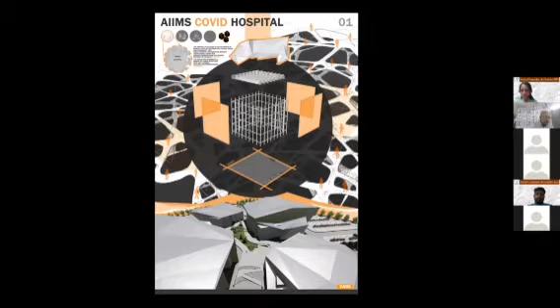And what is a celebration without its food? So, taking food into consideration, we have developed our concept from the delicacy of Gujarat, which is actually dhoklas. So, it's a little fun path that we have taken, and we wanted to go through the different ways we could extract a concept from food. So food being an art form by itself helped us derive a concept, and the structure resembles a rigid yet porous structure that has a unique feature, or in other words, flavor.

So coming to the concept again, one of the main reasons celebration is so important in Gujarat is because it helps the people reflect an overall attitude of gratitude and acknowledgement of what people have instead of focusing on what they don't have, or on anything in the future. And this is something that we try to cultivate within the hospital itself. That's the kind of mentality or ambience that we would want to achieve, to be a safe place basically.

This is the initial stage of the strategies that we derived and adapted to represent the word flavor and to represent our concept. And as you can see from the pictures, we try to abstract different forms that make use of the word flavor in terms of color, shape, and other ways. You'll notice it when we start the actual presentation of the master plan and the structure by itself. So, yeah.

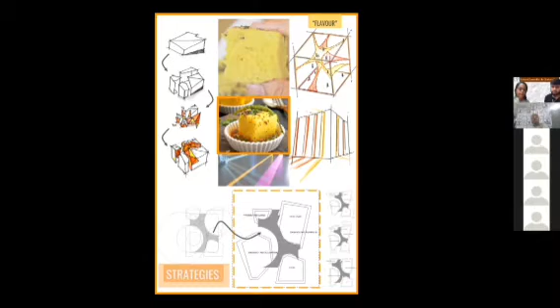Coming to the master plan, the orientation of the building is aligned in east-west direction, allowing abundant air and wind flow to penetrate within the building structure. So the entire AIIMS project site was 300 acres, out of which we chose only 10 acres. The FAR was 30%. The ground coverage was 30%. Our built-up area came up to around 7,000 square meters.

Talking about the zoning, we segregated the hospital zone in such a way that it resembled our concept. The campus is segregated into four slices of dhokla, which helps us create an internal landscape, which in turn helps us maintain a microclimate within the campus, because it is a hot and humid climate in Gujarat. We've also provided recreational spaces within the campus to ensure that the patients get enough exposure to sunlight and vitamin D. There is an ample amount of barren land in the site for future expansion as well.

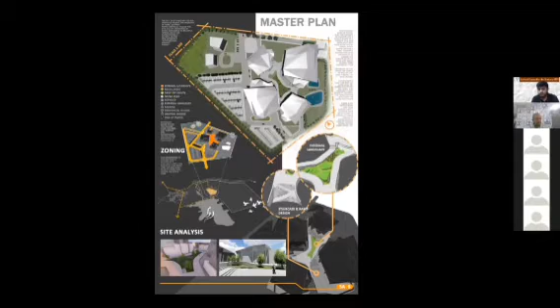Okay, so coming to the site plan, as you can see, we denoted two main entries to the site, one from the northeastern side and the other from the southern side. The northeastern entry is mainly for access to the main block and for the residences, and it can also be used for the services. Whereas the southern entry is primarily for the ambulances and also a dedicated separate entry for the COVID blocks.

As it has been mentioned before, we separated the hospital into four different blocks. So we made sure that the safe distance is maintained between the blocks and also between the residential block and the hospital. In addition to that, we have provided the parking to the southwest of the site, which is again segregated into a COVID and a general hospital parking. And as he mentioned before, sufficient space was also allotted for future expansion and also for the landscape for the hospital.

Now below we have the two section lines. The first one running through the emergency and the pharmacy, and the second one running through the diagnostic and pharmacy. Now in this, you can notice there is a varying plinth level, or a variation in the height of the buildings. It was done so that the hospital can create a campus within itself, and it is achieved through level differences.

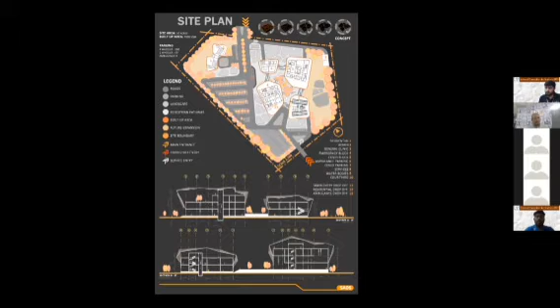Coming to the plans, we'll start with the first block, that is admin and the pharmacy. In the first block, the ground floor generally comprises the pharmacy and the medical storage, whereas the second floor comprises the administration, the financial departments, and the conference room.

Next comes the general clinic and diagnostic. The ground floor consists of all the clinics, and you have a medical store right at the entrance of the block. It also has a double-height atrium. The orange parts here are all denoted as the sterilized zones.

It also comprises the ENT clinics and the physiotherapy rooms, which are connected to the open courtyard. There is a food court towards the end, which is connected to the kitchen and has a separate service entry. The first floor consists of all the labs, the auditoriums, the CT scans, radiology, and other departments. And the second floor mainly comprises the inpatient wards and the doctors' rooms.

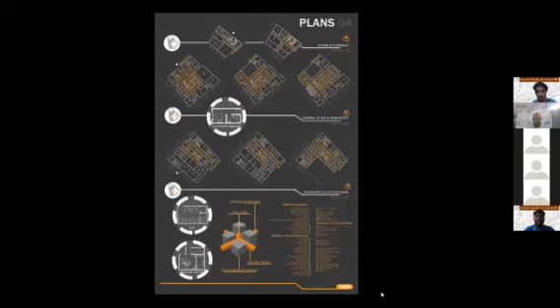Coming to the COVID block, it is designed specially for situations during a pandemic. It is flexible and designed to serve the requirements during an unexpected outbreak. The material design helps with easy assembly and cleaning. If you see the advantages of this structure, it's prefabricated, expandable, modular, reusable, flexible, with services that interconnect assembly.

If you go to the plan, there is a secure screening done at the entrance of this block. The patients are kept in an isolation zone, which is 3 meters in height, and the room is 3 by 2 meters. There's an AHU controlled core, the air handling unit. The staff zone maintains the whole patient ward, and there is a sanitization zone. The circulation is contained and very well controlled. A separate AHU system is assigned for the patients and a separate system for the contained core.

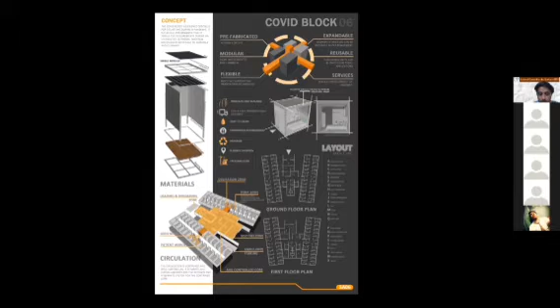Coming to the construction details, the structure is a self-supporting rigid frame structure. The central core is made of concrete, the slabs are also made of concrete, and the framework on which the modules are supported is made of steel. The columns are square hollow frame structures, and the shell on top is supported with a truss system.

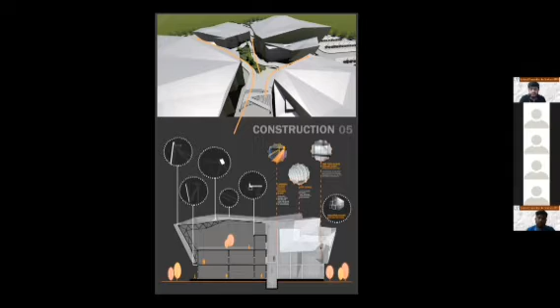Why the shell? The main reason we provided a shell on top of our building is the hot and humid climate of Gujarat. Since it is hot and humid, we wanted to inculcate heat control and provide insulation inside the building. So the shell acts as a protective layer, which helps deflect the harmful sun rays and also acts as a shading device for the entire building envelope.

Coming to the detail of the shell, the shell is a combination of steel and ETFE panels. The porous substance in the shell is made of the ETFE panels, which prevent harmful sun rays from coming into the structure. And there is an air gap between two layers of the shell, which helps provide insulation within the structure. The entire structure is a rigid frame structure with a central core, which provides more stability and strength.

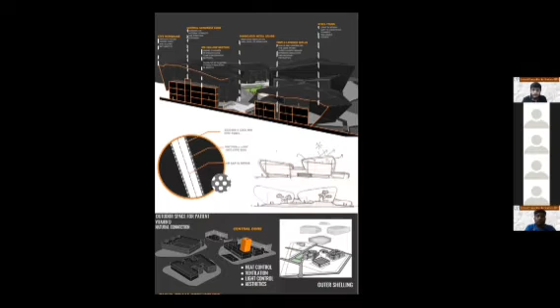The hospital design is planned with the sole purpose of positively beating the current pandemic. COVID has caused a lot of problems and pain for millions who have been affected immensely. With the help of the design and engineering industry, we have the power to slowly beat the virus and create a safe and prepared lifestyle for any future similar situations. So that's how we planned our model. We wanted to make sure it's expandable and easy to maintain.

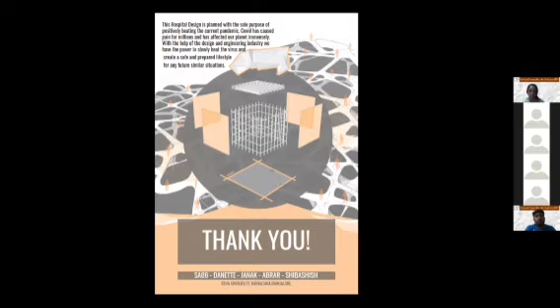And since the brief also mentions that it has to be constructed within 100 days, we tried to abide by the rules of the brief and make it possible for this concept or structure to be built in real life, irrespective of its location. So now we'll go to the walkthrough.

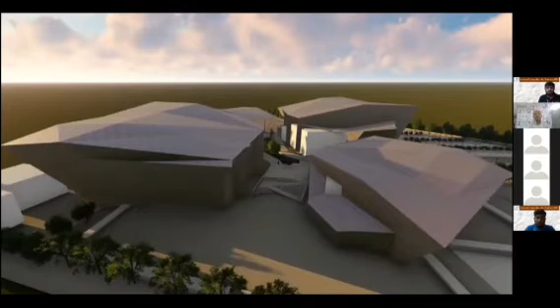Is there any audio with this? No, sir. I think if there is no audio, you can comment over it, give a commentary.

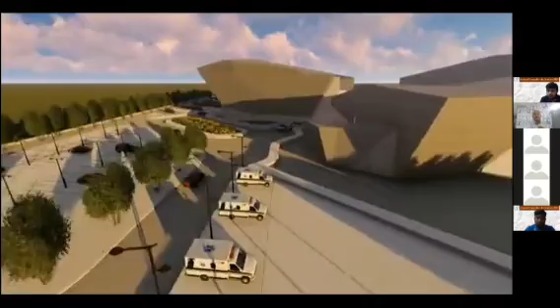So you can see the ambulance parking near the emergency block. Now you can see separate parkings for the main hospital and the COVID block, which is segregated. Right from the first point you enter the site, everything is segregated so that the COVID patients and the general hospital patients do not interact. It is separate, segregated in such a way.

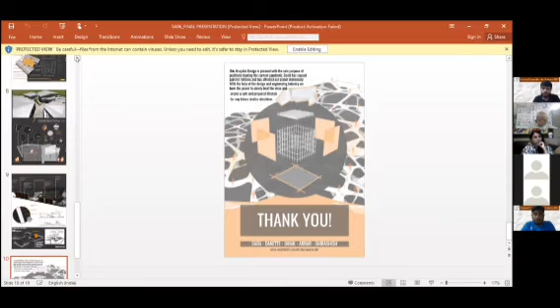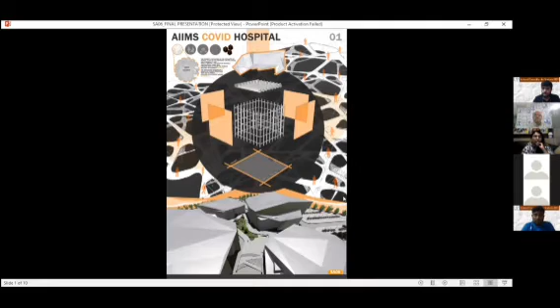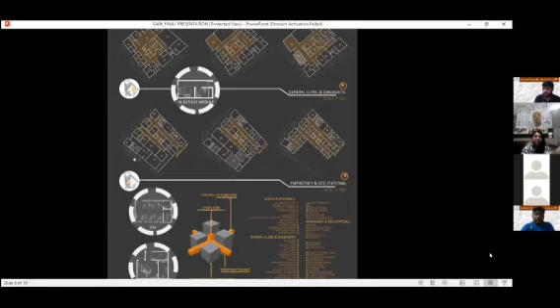Okay, can I see the plans once? Yes, ma'am. Let's see the plans once. It's hardly visible. Anyway, what I'm saying is you have separated out the blocks, right? Now, do you have sufficient service cores? I mean, the stair and those cores, have you taken care of that? Where's your staircase? Ma'am, here there is a staircase and the lift lobby.

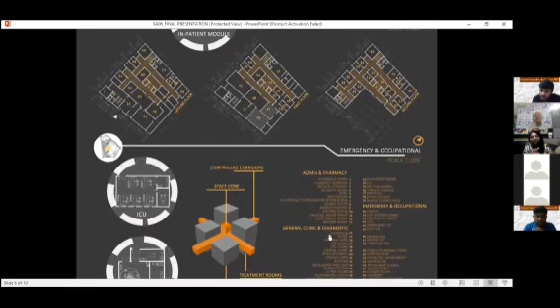You know, in a hospital block, if you are separating it out, for fire protection this is the basic thing: 2 staircases for the exit requirement. Yes, ma'am. There are 2 staircases, numbered as 5. There are 2 staircases? Fine, then that's fine. And what about some units like 54, what about the ventilation? There are some units which are inside, surrounded by corridors. So how do you ventilate those?

54 is a blood bank, so that's why we placed it inside between the corridors. And the ventilation for the blood bank can be artificial. So that's what I wanted to understand. From a ventilation point of view, in all our planning, we prefer natural ventilation the most, unless it is very necessary. Of course, ACs are used these days. Without ACs, in Rajkot, you won't be able to manage.

But provision of natural ventilation, as you would be architects, is a must, I feel. So stress has to be given on natural ventilation, and spaces should be oriented so that the wind flow is studied climatically and then brought into your design. From all the entries, I'm stressing the ventilation part, because that is one important aspect of your design. Like here, in 33, I don't know what is there, those units are not ventilated. They have to be mechanically ventilated, right? So those need to be taken care of, I feel.

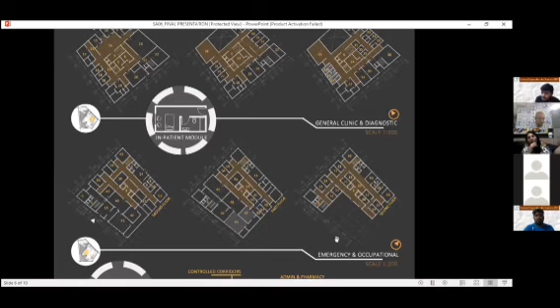So, yes. So you have created a nice space within, and whatever concept you have got, accordingly you have put the hospital blocks outside. And what is the height of the buildings? I mean, the blocks. We have all the 4 blocks at different heights. The maximum height that we achieved was for the emergency block, around 16.5 meters. For the diagnostic, it was 12 meters. And the pharmacy is the lowest, at 7 meters. So there is a variation in the height level.

Yeah, and I think proportion-wise, these are quite far. Like, what would be the distance between this block and this block? Would you know? Anyway, proportion-wise, look-wise, it looks proportionate. So that's okay. And each floor height is what? 4 meters floor to floor height.

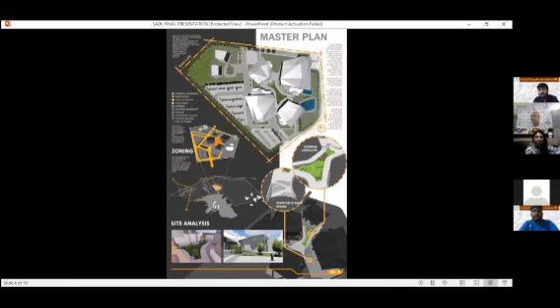What is the FAR you have used? FAR? Ma'am, FAR we used was 30% of the built-up area, which we have approximately taken as 7,000 square meters built-up area. I mean, what is the permissible FAR? It has been given in your brief, no? Yes, ma'am. We have calculated it and it's 12,000. 12,000. Okay.

Okay, fine. And the steel you mainly used in the roof and also the structure. Yes, ma'am. Even the modules are made of steel. So, modules. And facade-wise, you have used it in the roof mainly, isn't it? Yes, ma'am. Okay, nice, Shivashish and team. Nice presentation. Thank you. Thank you, ma'am.

So any other jury? Dr. Deshmukh, please. Yeah, just one comment. Most of the queries are over and things are quite clear. The central idea, the concept of flavor, is very well integrated into this plan. And those 4 blocks are very articulately put, with the in-between spaces probably designated as sterilized zones. So the basic idea is extremely good.